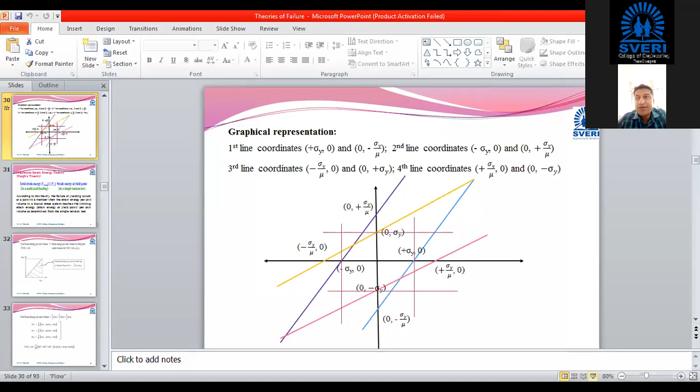So last time what we have seen is the maximum principal strain theory, in which we have seen that if the maximum strain is going to exceed the strain which has been developed, then the failure will occur. Now, if you don't have any problem related to the above theories, then we'll move further. We'll see the next theory, that is the fourth theory. This we have seen last time, the previous one.

Okay, the next theory is maximum strain energy theory. That is also called Haigh's theory, which is proposed by Haigh, and this is based on the energy possessed in any material. So when we say strain energy, what this theory suggests is that total strain energy in multi-axial loading, that is in our case, where practically forces are applied,

if it exceeds the strain energy which we have calculated or extracted from the simple tensile test, then the material will fail. Otherwise, if it is not exceeding, then the material is safe. This is the total strain energy in the material. If it exceeds the strain energy at the yield point, then the material is going to fail.

For all the previous theories, we have compared the theoretical results with the practical results from the simple tensile test, right? So according to this theory, failure or yielding occurs at a point in a member when the strain energy in that component per unit volume... We calculate strain energy per unit volume because otherwise it would apply only to that particular component. For any component manufactured from that material, we have to generalize this equation, and that's why strain energy is calculated per unit volume.

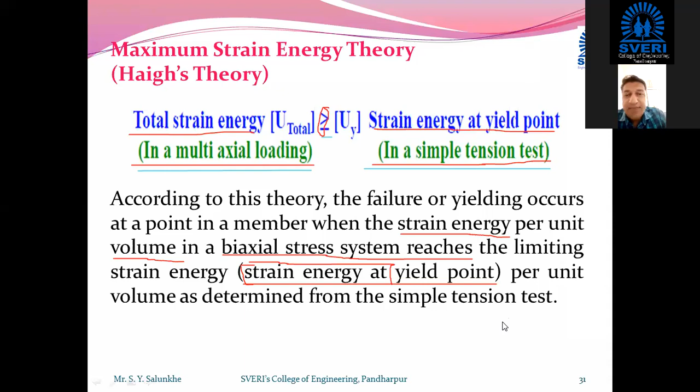In a biaxial stress system, when it reaches the limiting strain energy, that is strain energy at the yield point per unit volume, then failure will occur. Where do you find this strain energy? It is found when the simple tensile test is conducted with the UTM. So this is the statement of the fourth theory. Any problem? Now the question is how to calculate the strain energy.

The strain energy is calculated in one simple way: the strain energy per unit volume is calculated by means of the area under the stress-strain curve. Now this strain energy we are going to calculate.

Four people entered the waiting room. Okay, admit all.

Strain energy is calculated by calculating the area under the stress-strain curve. Here is the simple stress-strain curve, the curve we have drawn at the time of the tensile test. For ductile material, this is the curve we get, right? And we calculate it up to the yield point only, that is sigma y. After that, yielding starts, and we consider that as failure. That's why we are not going to consider that region.

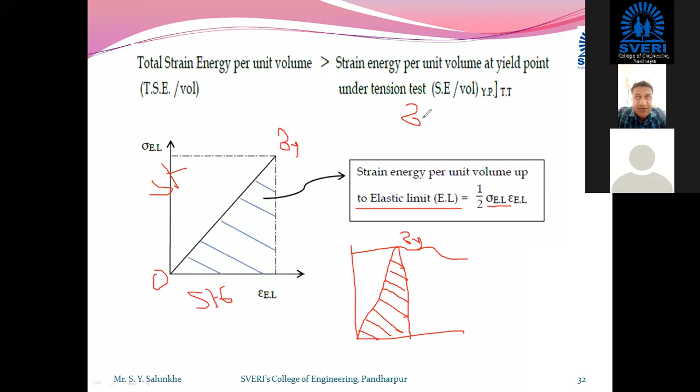So the height of this triangle is sigma y, and the base is epsilon y, because we consider this point as the yield point. Getting me? So graphically and mathematically you can calculate the strain energy per unit volume. While taking the average, what is the strain energy at the initial point? It is 0. So you write maximum strain energy, sigma y multiplied by epsilon y, plus initial strain energy 0, divided by 2. You get the same equation here. Got it?

See, you can write your comments if you have any doubt. If not, you can just write yes, we can move further. Writing comments, does it mean that you are not listening to me? No doubt. Okay, yes. Shubham, what? No doubt or your doubt?

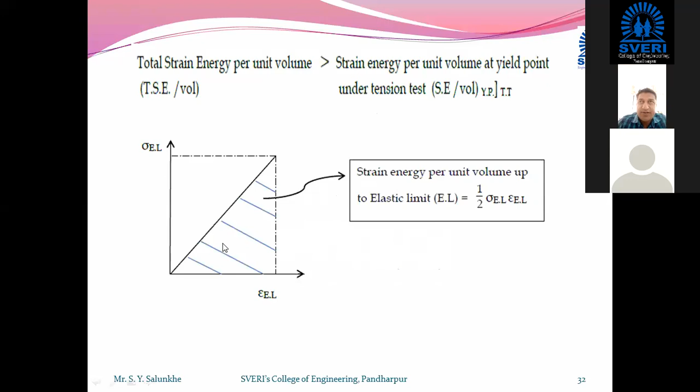Okay. So once you calculate the strain energy theoretically, what we have to do is calculate it practically also, and compare it. Practically means when we conduct the test with the UTM. This previous value we have calculated from the test conducted with the UTM, and strain energy per unit volume in case of a triaxial loading system is given by

half of the strain energy in x direction plus half of the strain energy in y direction plus half of the strain energy in z direction. Now this is for 3 dimensions. We are not going to consider 3 dimensions, so straight away you write sigma 3 and epsilon 3 value as 0 in this equation. So epsilon 1 is calculated as 1 over E, sigma 1 minus mu into sigma 2 plus sigma 3 for triaxial. These equations we have written for the triaxial strain, and this first equation for the triaxial strain energy.

So in this case, if you are taking it only for 2 dimensions, just put the value of sigma 3 as 0. So we get epsilon 3 also as 0, and we'll have only 2 equations. In this case, sigma 3 will be 0. So the equation which we have seen for the third theory, not principal strain energy, principal strain theory. That value will be epsilon 1 is equal to sigma 1 over E minus mu into sigma 2 by E. Same equation we have written for the third theory, right?

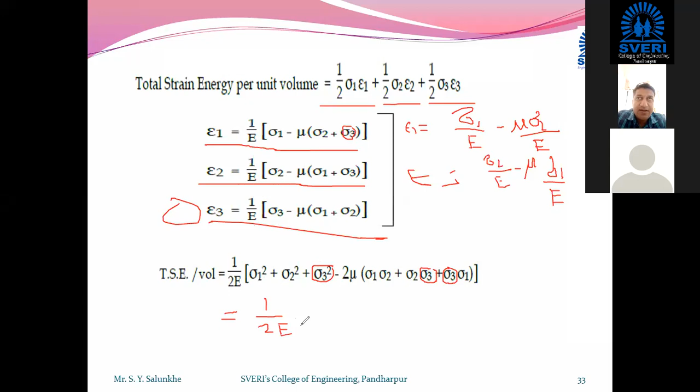So the equation will be 1 by 2E into bracket sigma 1 square plus sigma 2 square minus mu into sigma 1 multiplied by sigma 2. Okay. This equation we'll call equation 2. We have to compare it with the previous equation which we calculated from the simple tensile test. And if this strain energy per unit volume exceeds the value we calculated in the simple tensile test, then failure is going to occur.

Okay. Now let me ask one question. If we take this 2E to the other side, which type of equation is x square plus y square minus constant into x into y? Are you remembering which equation it is? What can we indicate by this equation? Mathematically, x square plus y square minus a xy is equal to b, where b is a constant. In the last equation I have written, this 1 over 2E we take to the other side. That is constant.

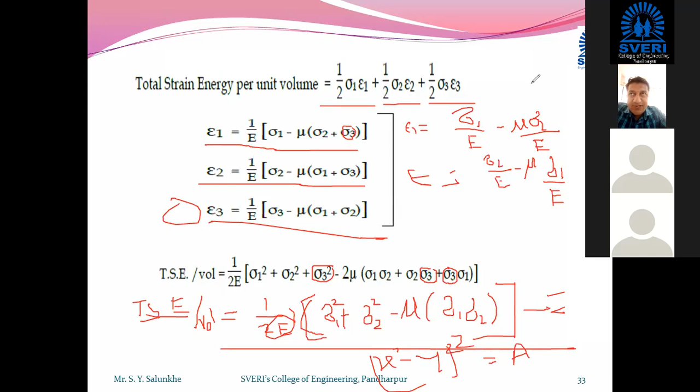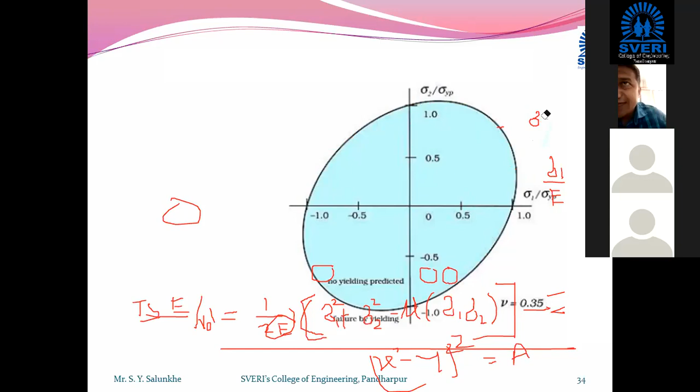So yes, this equation is this type. But what is indicated by this equation, x square plus y square minus mu into xy equal to A? Which type of line or curve is indicated? Hyperbola, parabola? Ellipse, sir. Ellipse. This equation is going to give us an ellipse. This diagram I have copied, not drawn, because it is drawn with scale. From the equation we derived, we get this ellipse.

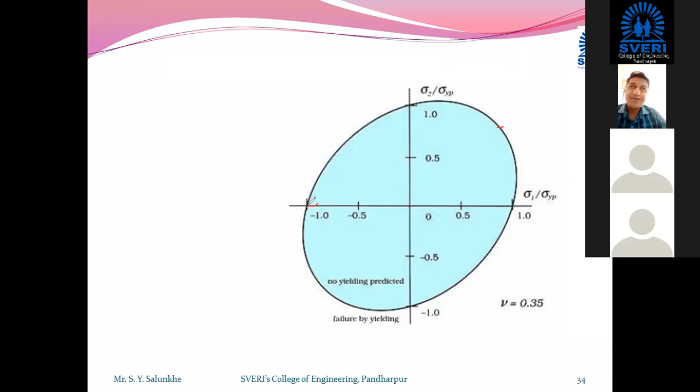So the previous second theory, the maximum shear stress theory, gives us this type of curve, if you are remembering. And this theory gives us this ellipse. So most of the points covered in the second theory, the maximum shear stress theory, are covered in this strain energy theory. So it is closer to the second theory, and that's why this theory is used for ductile materials.

Any doubt? Hello? Yes, sir. Do you have any doubt?